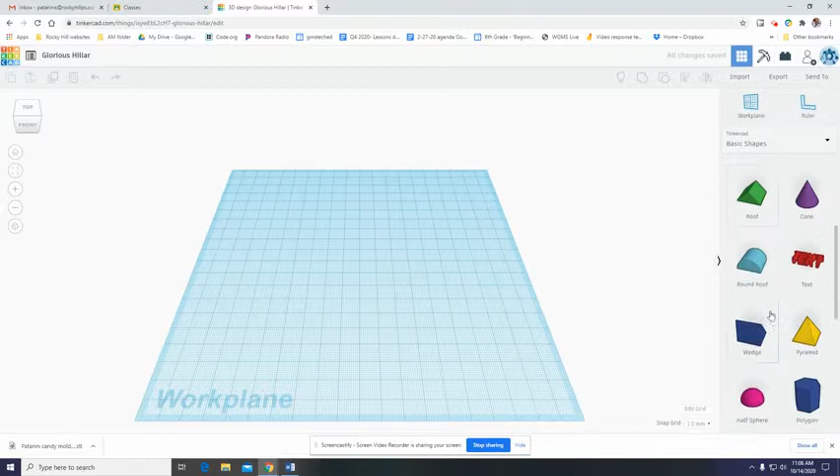So let me start a new design. I'll do it with the tube instead of the torus. I'm going to grab this guy and bring him over here, and make the wall thickness a little thicker. There we go, yeah, I like that.

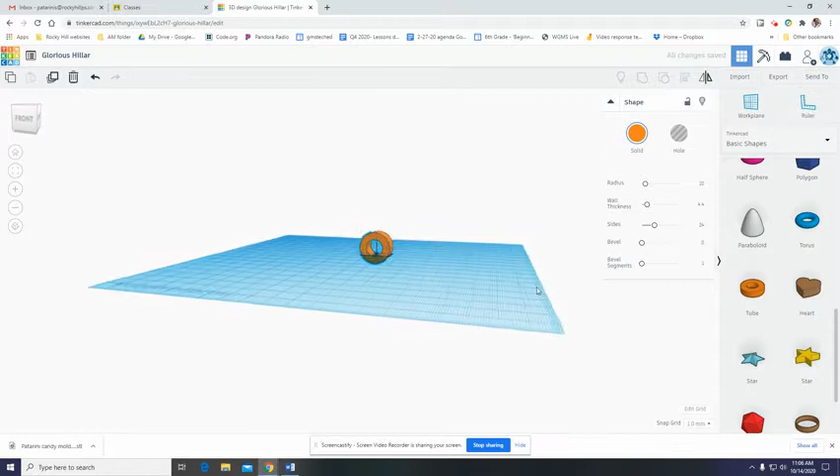Now, first thing I want to do is stand this thing up on its side. We should all know how to do that - type in 90 here. Now it's up there, but it's partially below my work plane. I'm going to use this thing that kind of looks like a birthday party hat, and pull it up until it says 0, so I know it's perfectly on the plane.

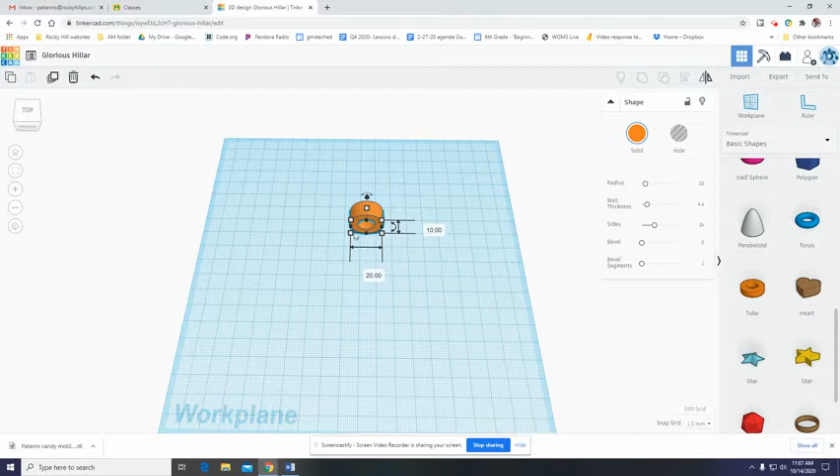All right, I'll start somewhere near the middle to do this. Now the whole thing is selected. These white boxes here, by the way, are called handles. When those handles are there, that's a super important trick as far as making this actually work.

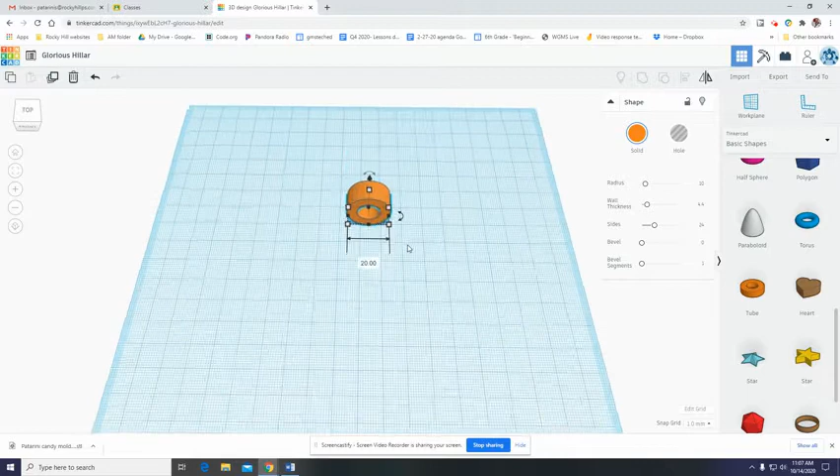So I'm going to use the Control key and the D key - that's Smart Duplicate. It's a little different than copying over here, duplicate and repeat. Oh, I guess that is the same thing, Control D. Anyway, what I just did was make a copy of this guy, exactly the same size, in exactly the same place. You can't see it yet because it's superimposed right on top of this piece.

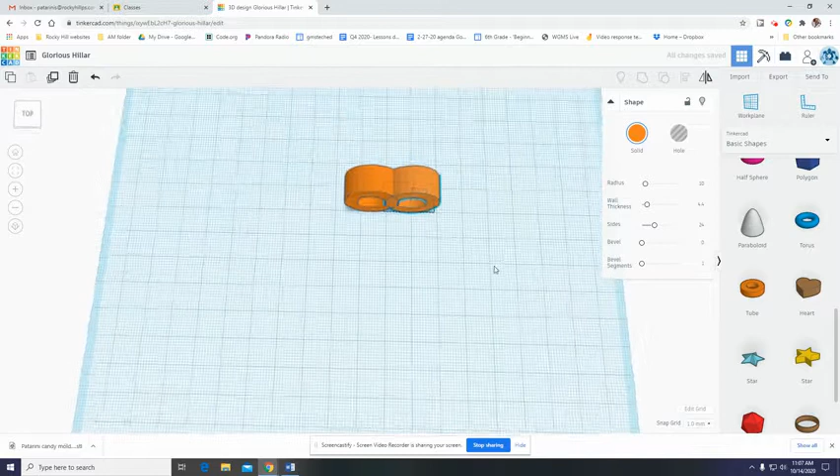If I click and drag, you can see - look at that, there's a second tube there. So now it's like that, in a straight line. What I want to do is take this second tube. By the way, you see how it's still got the handles on it? It's still selected - super important, as I mentioned.

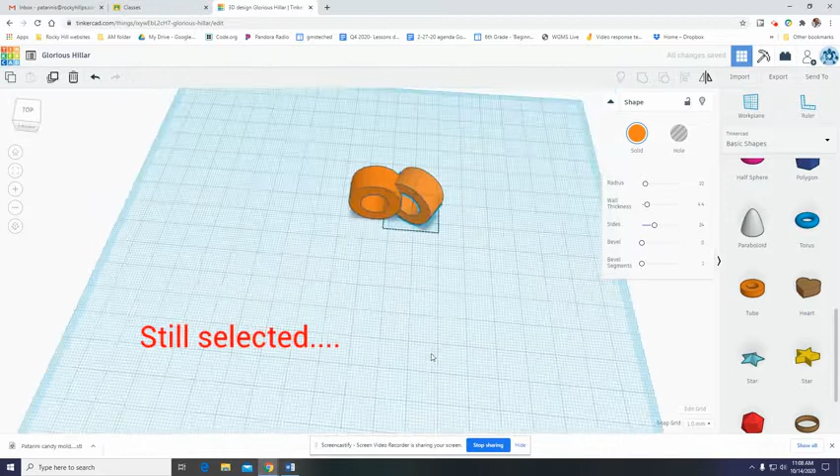Okay, so let's go here, and I'm going to change this by 30 degrees. Do you see how it turned like that? I've got a bit of an angle instead of being straight across. Now, I might have to move this guy.

This is where it gets really tricky - I have to make sure I don't change the size or shape of it. If I just grab it and pull it forward a little bit until... yeah, see, that's pretty nice. I like the way that lines up where the two join, here and there.

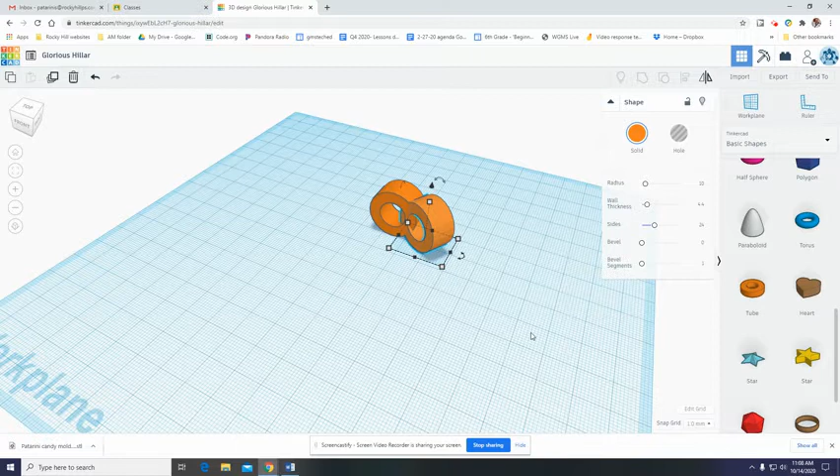All right, and since it's still selected, still has those handles, I'm going to press the Control D key, and another, and another, and another, and it keeps on going 30 degrees. By the way, 360 divided by 30 is, I think, 12, so there's 12 little rings

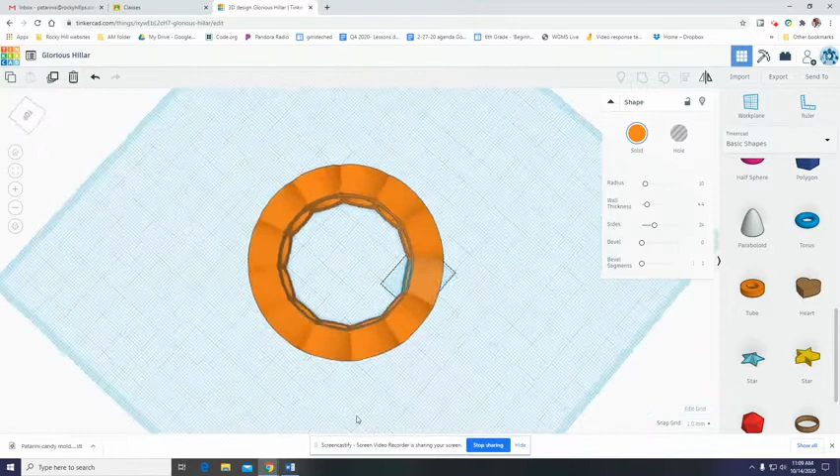in my bracelet. The whole key to this is that when you make that first copy, it always stays with these handles around it - in other words, it has to stay selected. If you click out of it once, this will not work. It's very frustrating - it took me a long time, and I actually had some students help me figure this out.

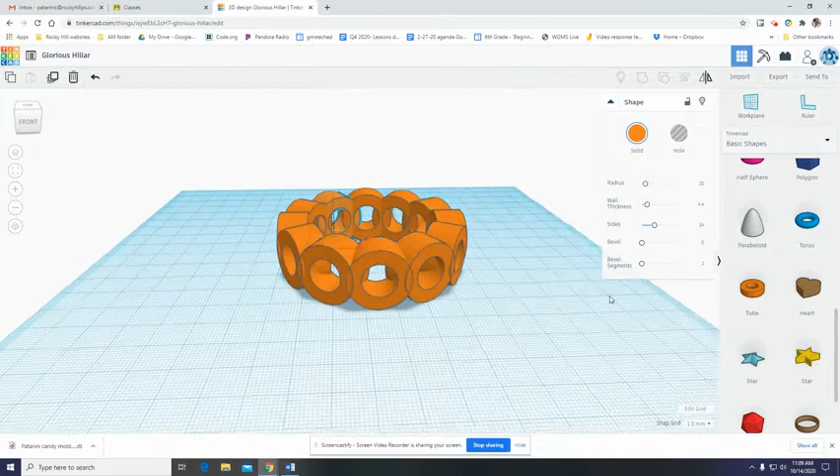Now that I've got my ring of things, by the way, you could do it with any one of these shapes - the heart, the paraboloid, or the star. You can make some really interesting designs here. But so far that has worked.

What I'm going to do is draw a box around all of this, and then over here I'm going to group it so it becomes one piece. And then I can change the size of it.

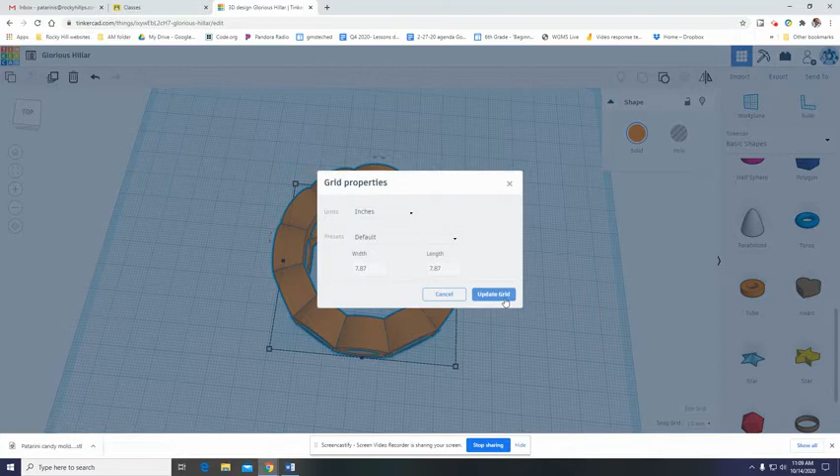Now remember that before this was in millimeters, and you know I don't like millimeters. I'm going to edit my grid and change it to inches, because I know about how big a bracelet should be in inches - 2.6 might be a little small, so if I click there I make it 3, and then make this one 3.

Now I've got a 3-inch diameter, I guess the outside diameter of the bracelet. I don't know how the inside bracelet diameter is - let's see, it's about 0.87. Let's make that 1, just because it's a nice even number.

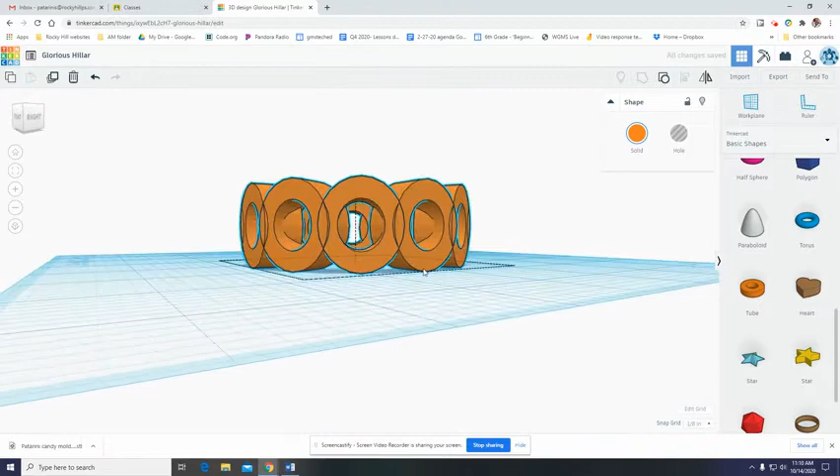All right, and there's my Smart Duplicate bracelet. So you should be able to do it yourself. I'll remember to name it Mr. Pat Bracelet 2.

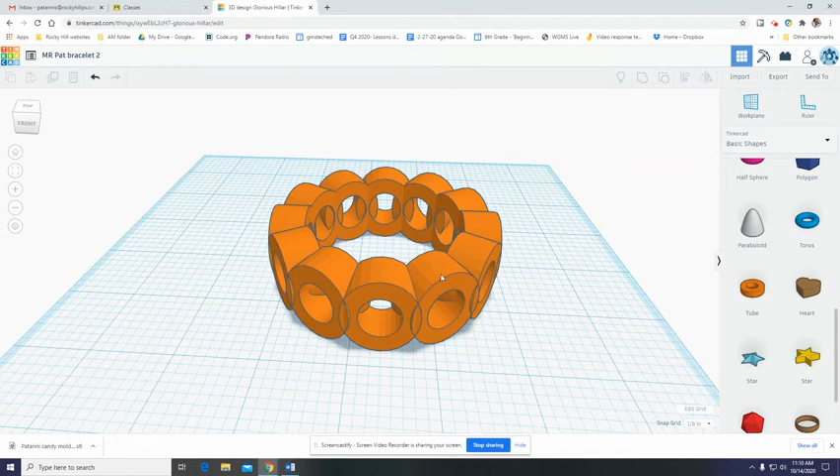And this whole Smart Duplicate tool is something that you can use on any one of these shapes. The trick is changing that angle by 30 degrees so that you get it to go all the way around in a circle. Okay? Good luck.